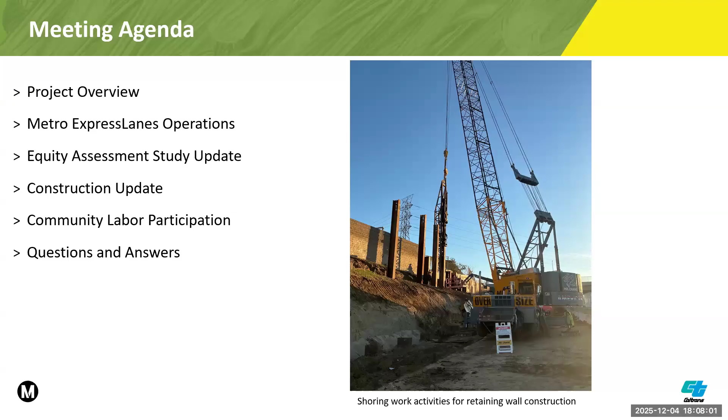Then we will segue into a construction update and share with you the details of the work activities along the corridor, as well as construction timelines. After that, we'll move into community labor participation, which involves the efforts undertaken by our contractor in hiring workers for the project from the local community, a great worthy endeavor. At this point in time, we will get right into a project overview for the project.

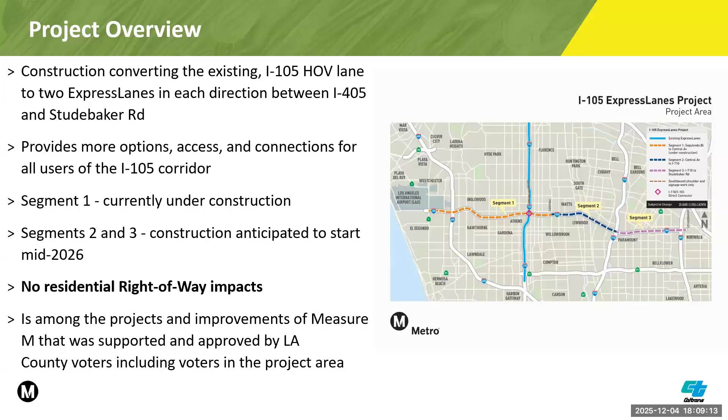The project will help solve several key issues on the I-105. First, it addresses speed degradation in the existing HOV lane that often drops below 45 miles per hour during peak travel times. Under 45 is considered below federal performance standards. With the express lanes, dynamic pricing will help maintain speeds above 45 miles per hour and improve flow and reliability. The project will also enhance overall corridor operations, providing more reliable travel times for car pools, van pools, commuters, and transit service to LAX. Importantly, the general purpose lanes will also benefit from this improved traffic flow.

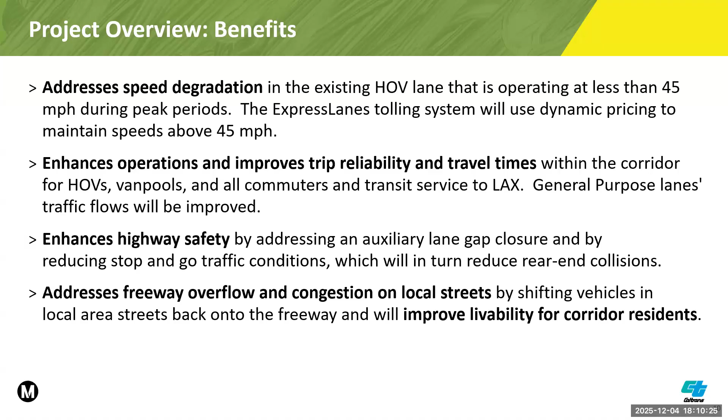We will also be improving highway safety by closing an auxiliary lane gap and reducing stop and go conditions, which will help lower the risk of rear-end collisions. Finally, the project helps reduce freeway overflow onto local streets, shifting the traffic back onto the I-105 and improving livability for residents in the surrounding communities.

Current traffic data shows just how heavily congested the I-105 corridor is today. In the westbound lanes during morning peak hours, general purpose lanes take about 36 minutes end to end, averaging just about 26 miles per hour. Even the HOV lanes average only about 32 miles per hour, again below that federal performance of 45 miles per hour.

Eastbound in the afternoon peak hours, conditions are even worse, with general purpose lanes taking about 65 minutes end to end, averaging about 15 miles per hour, while the HOV lanes average about 19. Because the HOV lanes are consistently falling below 45 miles per hour, they are considered degraded under the federal standards. With the Express Lane project, we expect to reduce general purpose travel times by up to 10%, and the Express Lanes will be designed to maintain speeds above 45 miles per hour for more reliable trips.

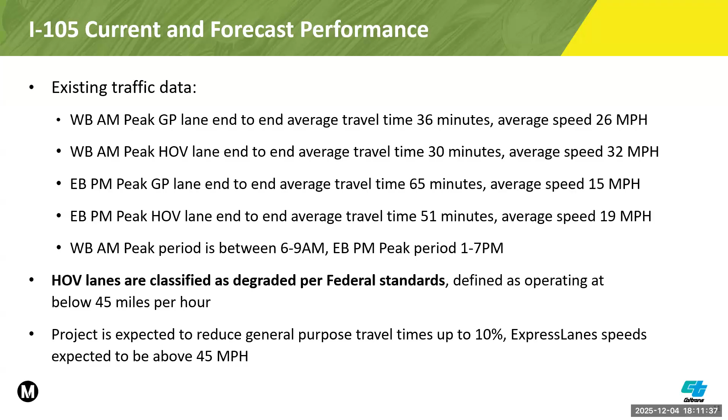The I-105 Express Lanes project also brings several important safety benefits. We're adding auxiliary lanes between the I-710 and Long Beach Boulevard, which will make merging smoother and safer. By improving overall traffic flow, the project helps reduce stop and go conditions, which in turn reduces rear end collisions, which is one of the most common crash types that we see on the I-105.

We're also upgrading striping for better visibility at night, helping drivers navigate the corridor more safely. And finally, we'll be adding channelizers in the buffer zones between the express lanes and the general purpose lanes that will help prevent illegal merges and support safer, more predictable traffic movements.

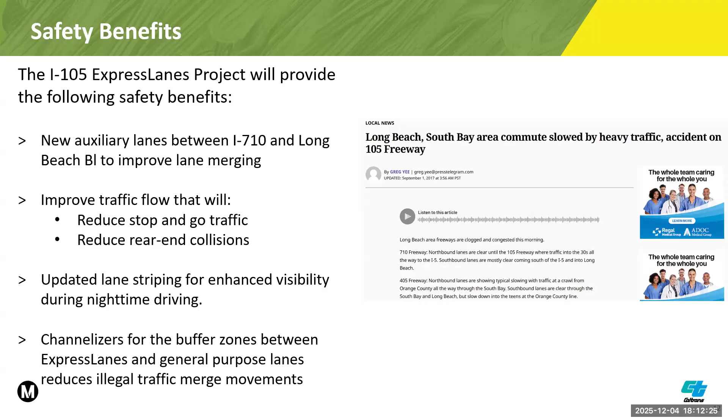Looking ahead to next year, construction on segments 2 and 3 are expected to begin mid-2026. And segment 1 is scheduled to be completed in 2028, ahead of the 2028 Summer Olympics here in Los Angeles.

In addition to the express lanes, the project also brings several other community benefits. We'll be adding new sound walls in portions of the freeway where there were none before, and we'll be completing a seismic retrofit of the Alameda Viaduct to improve its overall safety. The project also includes multimodal improvements with funding for upgrades at the Harbor and Avalon C line station for things like lighting, wayfinding, and state of good repair needs.

We'll also be exploring lighting enhancements at the undercrossings where we're widening the bridges in segment 1. And looking forward again, future net toll revenue will help fund active transportation, transit, and roadway improvements in the communities along the corridor. A little bit more on that a little later in the presentation.

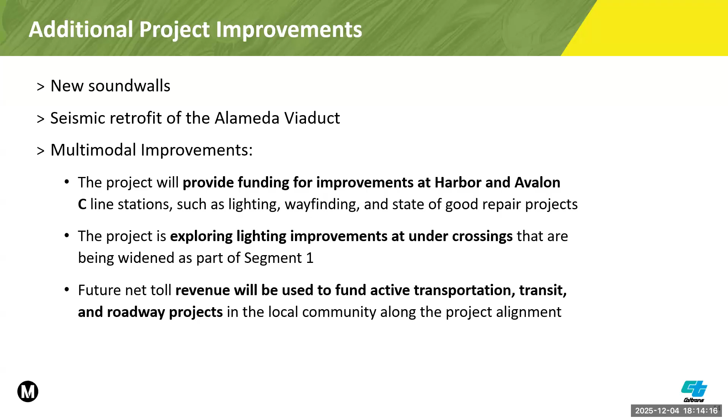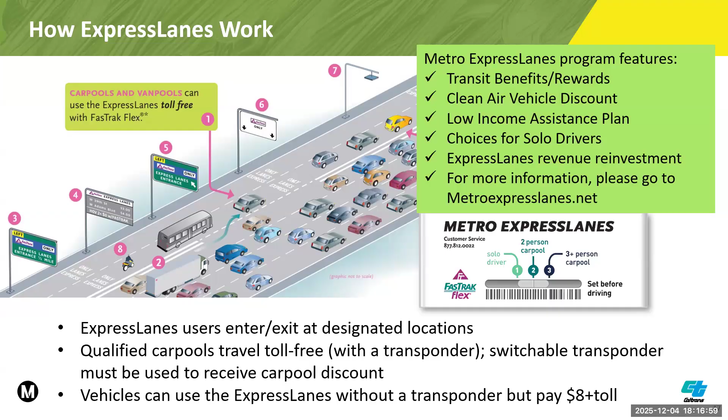I'd like to talk also briefly about an equity assessment that we recently completed. We prepared an equity assessment for segment 2 and 3 of the project. The purpose of the equity assessment is to identify and prioritize potential projects that can be funded with toll revenue generated from the express lanes. We often get asked what we do with the revenue and the tolls that people pay to use the express lanes, so we've developed a plan in cooperation with community-based organizations. We worked with 21 CBOs in the corridor to identify this list of projects that we could fund, and it includes active transportation, transit, and roadway projects.

We do have the executive summary and project list if you're interested, and I'll put the link in the chat if you'd like more information. We also completed a segment 1 equity assessment a little over a year ago, and that document is available on our website, Metro Express Lanes at /105 Express Lanes, if you'd like to take a look. At this point, I'd like to turn the presentation over to Ron Macias.

Great, thank you, Philbert. Before I continue, I hope you're not disturbed. We are having a fire alarm drill here at this time at the building where I'm at, so I'm hoping this is not heard by the audience. Please bear with us. But again, thank you, Philbert, for that.

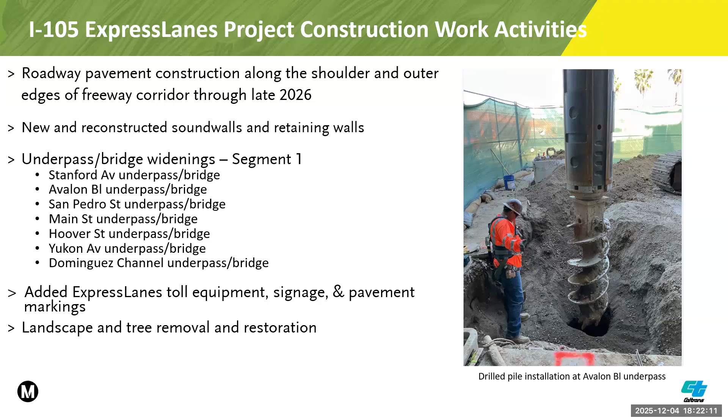Now we'll move to a construction schedule. Here you see a rough overview of the timeline of the overall project, which includes the work activities and construction phases within segment 1 of the project, as well as the timeline for segments 2 and 3.

As you can see, we are in late 2025, in the phase of the project performing work activities for roadway pavement construction and other related work, shown in that large blue shaded arrow. We'll eventually proceed to mid-2026, to another phase of the project where work will shift to the center of the freeway to install express lane infrastructure and various features.

In the later phases of the project within segment 1, you will start to see active work being performed in the segments 2 and 3 area, anticipated to begin roughly around mid-2026, while construction continues within segment 1 at that time. Then we'll proceed to the latter part of 2027 as construction continues.

The project anticipates testing of the express lanes tolling system at that time, leading up to 2028. As Jesse stated, the project is anticipated to be completed by the time of the Olympics in 2028, while segments 2 and 3 will continue on till 2029. So that is the anticipated construction timeline.

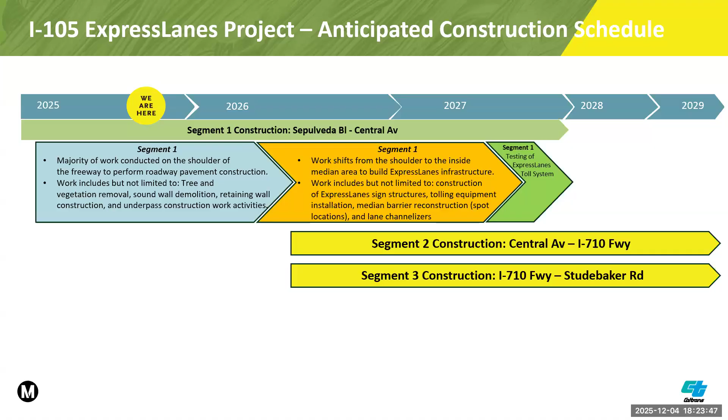Now we'll get into some more details regarding some of the actual work activities. The sound walls, as you can see, are being constructed along various segments of the corridor. In order to construct new roadway pavement at these locations, sound walls that have existed are being reconstructed, with the addition of new sound walls that will be constructed.

These reconstructed sound walls, most of them are being rebuilt to a taller height than prior to the start of the construction project—roughly 6 to 8 feet taller—as we move the sound walls a little further outward to accommodate the new express lanes. And at some locations, as stated, there are new sound walls being constructed.

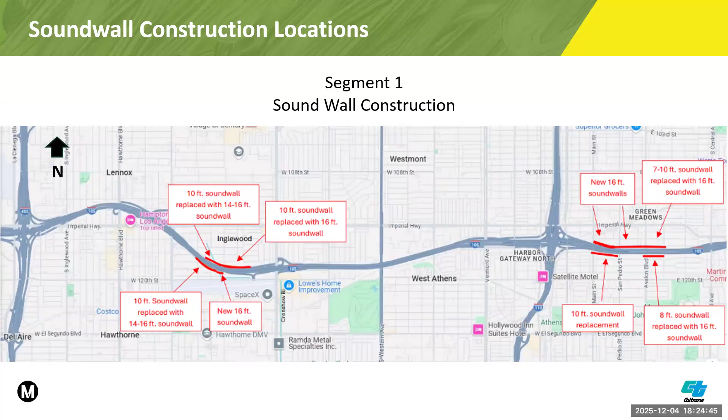As far as a general construction schedule for these sound walls, there's a timeline that generally applies to all of these sound wall construction activities along the corridor. It takes roughly a little bit more than a year to complete the overall construction of these sound wall locations. We started roughly in spring 2025.

Most of the work activities are performed during daytime hours. We had to remove the sound wall and then prepare the work site, removing landscaping and trees just at the locations where needed to perform the work, grading the area and starting the foundation for the walls. Then we started to reconstruct the sound walls, and that's roughly where we're at this point in time, as we are ending 2025.

We intend to continue the reconstruction and building of the sound walls into the next year. Once the sound walls are completely constructed, we will continue work activities to grade the area and perform excavation to continue the new roadway pavement construction alongside the sound walls.

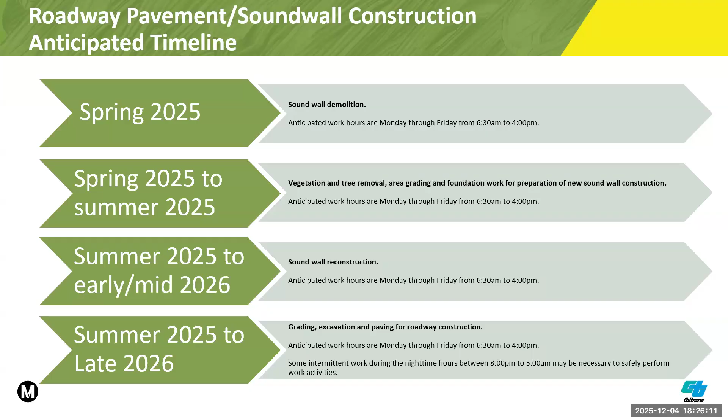A couple of these exhibits will show you an image of some of these locations and a closer look of the sound wall construction areas. This location is the easterly section of segment 1 of the corridor, where there is a reconstruction of sound walls near Avalon Boulevard on both sides of the freeway, as well as the area just to the west, shown in the bottom image. As you can see, the sound wall depicted in orange is where a new sound wall is being constructed as part of this project.

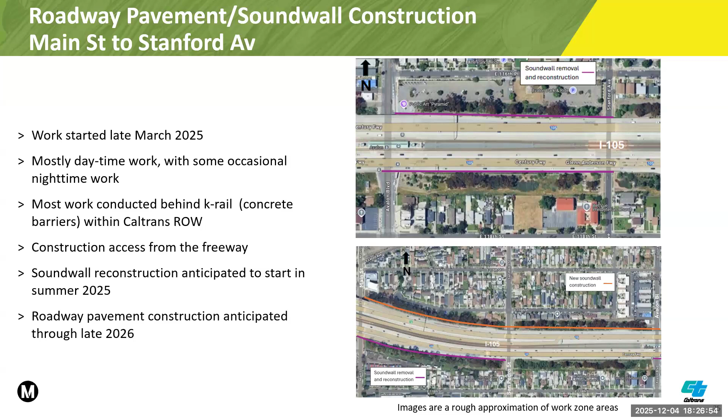We'll show the next image on the next slide, farther to the west in the city of Inglewood and city of Hawthorne. The upper image near the Crenshaw on-ramp in Yukon shows a sound wall being reconstructed there. Also, just immediately to the west, the bottom image depicts the sound wall under reconstruction in the city of Hawthorne. As stated, construction of these sound walls is performed in conjunction with the new roadway pavement construction.

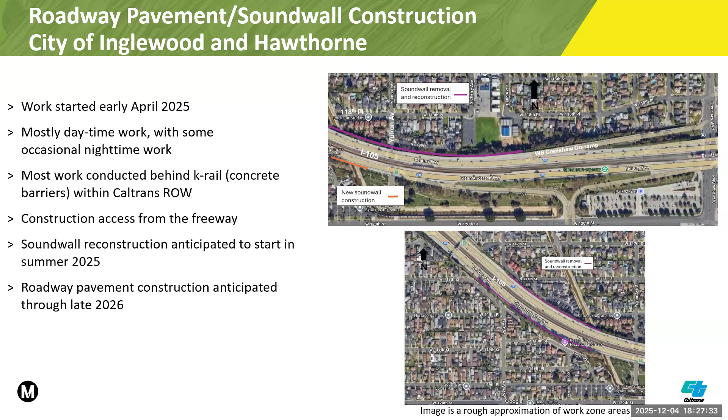Then we'll move on to bridge undercrossings. As mentioned, we have work activities involving various underpasses and bridges to support new roadway construction at various locations. We mentioned those locations in the previous slide, but they are depicted here in these images as construction is ongoing.

We started roughly spring of 2025. We anticipate construction continuing into mid to late 2026. The work activities include drilled pile installation, barrier and overhang demolition, some excavation and foundation work, and deck installation as well. We recently installed falsework, which are bridge support structures, at many of those locations.

Most of the work activities are being conducted during daytime hours, with most work being conducted behind K-rail. But there are some instances where nighttime work activities are necessary to perform certain work for those structures in the city of LA. For those 5 structures, there is a need to close the street fully in order to perform certain work activities safely during nighttime hours, since work is performed directly above the street. These streets are only allowed to be closed during the nighttime hours.

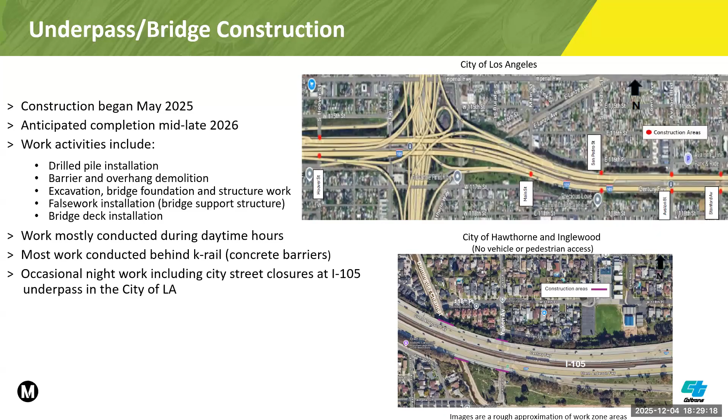So we'll move on to retaining wall construction. As mentioned, we have various retaining walls under construction at various locations along the freeway. As part of this new roadway pavement construction, these walls are primarily built where project improvements are being constructed next to a hillside along the interior of the freeway corridor. They are installed right up against the hillside, in essence to stabilize, hold back, or retain the slope of the hillside.

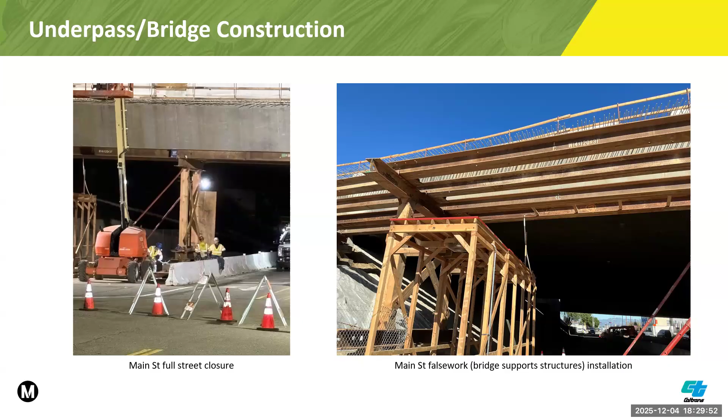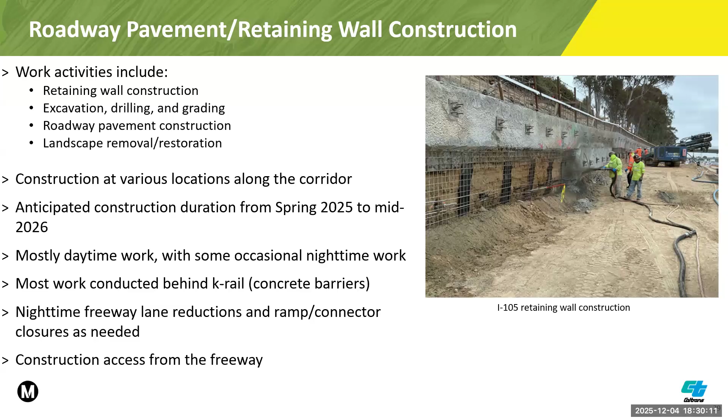Next slide, please. That's the retaining wall construction area. There you see work crews in the photo building the actual retaining wall along the hillside. And there you see an image of the retaining walls under construction.

This is a typical representation of work activities involving retaining wall construction. You see the equipment in the center of the image, with traffic on one side and the equipment right in the middle there. The excavator is digging into the hillside in order to construct the actual retaining wall. Here you see a dotted line where the retaining wall is being built. The second dotted line is the shoring being installed into the retaining wall, which holds back and stabilizes the hillside to allow a safe workspace for the crews to perform the work.

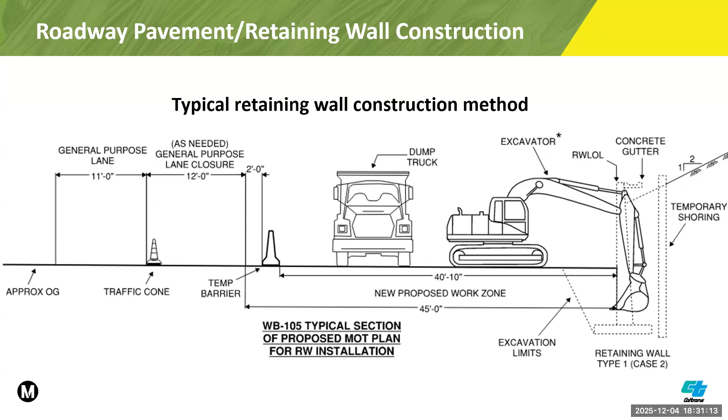The next slide will show some of the typical areas along the freeway where these retaining walls are being constructed. This is a segment along the freeway where many retaining walls are being built, between Western Avenue and Crenshaw. As you can see on the bottom image, that's where most of the retaining walls are under construction. The top image shows a typical area where work is being constructed into the hillside along the interior of the freeway corridor to build this new roadway pavement.

As you see, the freeway is at a lower elevation than the top of the hillside, where the community actually resides. So this is roughly a typical location where retaining walls are being constructed throughout the project, and this is occurring throughout the corridor. As stated, the area in the bottom image is between Crenshaw and Western, where most of the retaining walls are under construction.

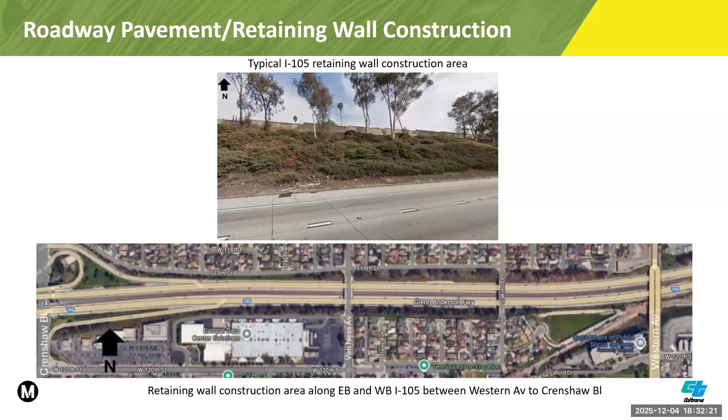Then we'll move on to a new set of work activities that are ongoing. These particular work activities are going to start on the actual local city streets of LA on the western end of the alignment, immediately adjacent to the actual freeway corridor.

These are work activities related to the electrical work to support the new tolling system of the future toll lanes. The image on the bottom shows the various work locations where this work will be performed on the western end of the corridor, adjacent to the I-105 corridor, from west of Nash Avenue to Inglewood Avenue.

Mostly this will be daytime work, from 9 a.m. to 3 p.m., with lane closures and some ramp closures in order to perform this work. We anticipate starting this street level work in December 2025, with an approximate duration of roughly 6 months for the totality of all these work activities.

We anticipate a duration of 3 weeks for each of these street locations or phases of work. However, the work along Imperial Highway is anticipated to last roughly 5 to 6 weeks due to the larger work zone area, as shown here on the western end of this map. There's a great deal of work from Nash all the way up into Aviation, which is why it will take a little bit longer at this location. Work crews intend to jump around from location to location, working at various work locations simultaneously.

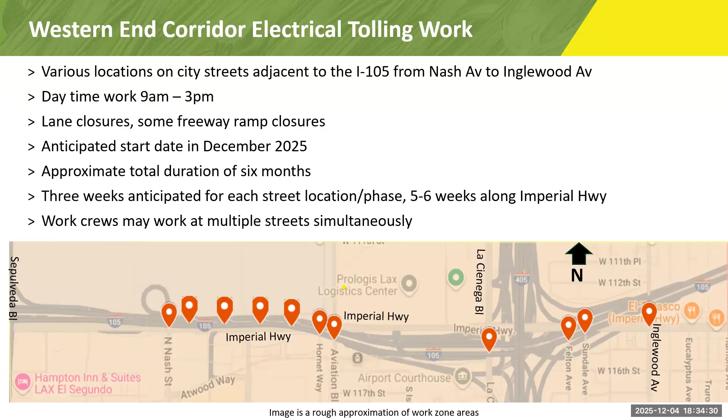Now we'll move into traffic control. The project continues, since the beginning, to implement traffic control as part of and in support of facilitating the building of these improvements. There is a need to implement traffic control in order to perform its construction and build its improvements.

We have ongoing work on the outer edges of the freeway, intermittently implementing closures of ramps and on-ramps. Lane closures along the freeway are occurring on a regular basis to perform this work, and there have been some intermittent connector closures as well. Some work activities have to be performed at night, because closures or traffic control on the freeway is usually allowed only during nighttime hours in most instances, so certain work has to be done at night as well.

We also have ongoing electrical work to support the new tolling system on the southbound I-110 freeway, implementing some freeway lane closures on that corridor as well as intermittent ramp and connector closures, and we have some upcoming directional closures planned along the freeway. You may recall that during the early phases of the project, we implemented a series of closures in one direction of the freeway to support lane restriping and establish a work zone in order to maintain existing traffic lanes during construction.

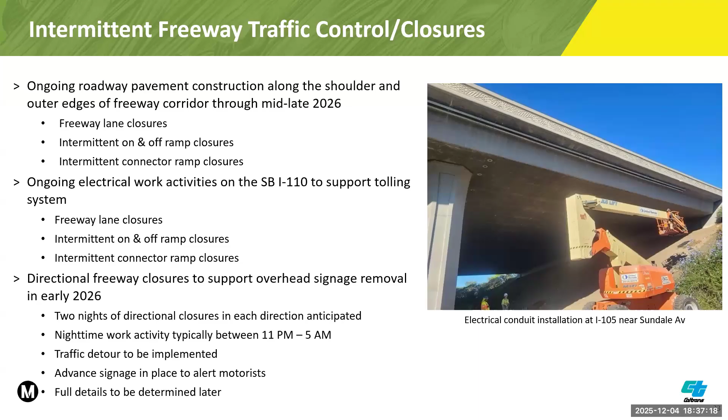From this point on, we will move on to the presentation on community labor participation provided by the project. We'll bring up Glenn Polk, representing the contractor for the project, Flatiron Myers joint venture, to discuss their efforts in hiring workers for the project from the local community.

Thank you, Ron. Good evening. My name is Glenn Polk, and I'm the Segment 1 project manager for the Flatiron Myers joint venture. I'm really pleased to be here to speak about our community development efforts on the project thus far. This subject is really near and dear to my heart. I grew up here in LA and actually started on a Metro project as an intern through a Metro program geared towards community involvement, which has been a springboard for a very rewarding career. I've worked in construction for over 25 years, so community involvement is very important to me and to the companies.

What we've been doing thus far, our team is currently partnering with apprenticeship readiness programs in the area. We believe these partnerships provide an on-ramp to a career in the building trades. We're also doing a lot to hire local workers. We've got journeymen, we've got apprentices, different grades of apprentice. We also believe these efforts give us a strong workforce in the area and also a strong workforce for us to take to other projects.

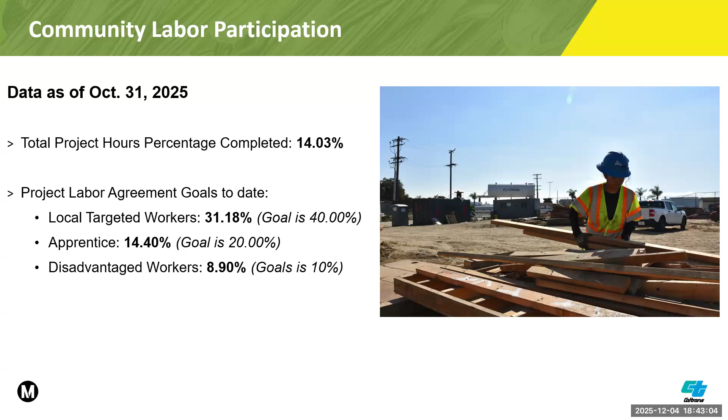Same thing with the apprentices: we have employed 14.40% of the total goal of 20%. And those that have barriers, or what we call disadvantaged workers, we have 8.9%, and the goal is 10% for this project. To discuss the demographics of the community, I'm passing it on to Christian.

Thank you, Dino. I will give a quick update on the demographics of the workers over at the 105. Just to echo what was said earlier, Flatiron Myers joint venture is committed to hiring local members of the community. So far, there have been 1,065 workers hired as of October 31st, 2025: 75 African American, 6 Asian, 659 Hispanic, 3 Native American, and finally we've hired 27 female workers as well. I will pass it back to Ron Macias for his closing remarks.